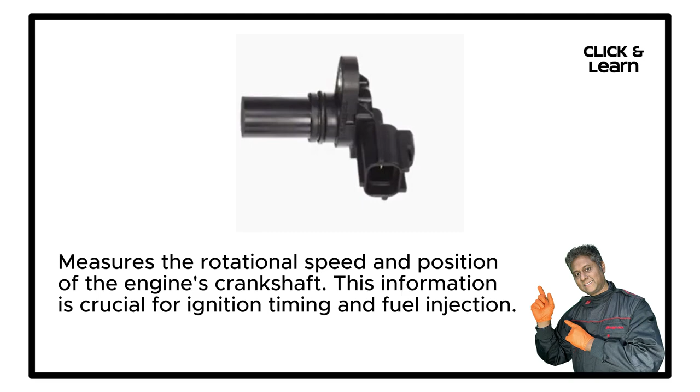Okay, let's get started. Crankshaft position sensor measures the rotational speed and position of the engine's crankshaft. This information is crucial for ignition timing and fuel injection. Typically uses a magnetic or Hall effect sensor to detect the rotation of the crankshaft's reluctor wheel, generates electrical pulses as the wheel's teeth pass by the sensor. The number and timing of these pulses provide information about the crankshaft's position and speed.

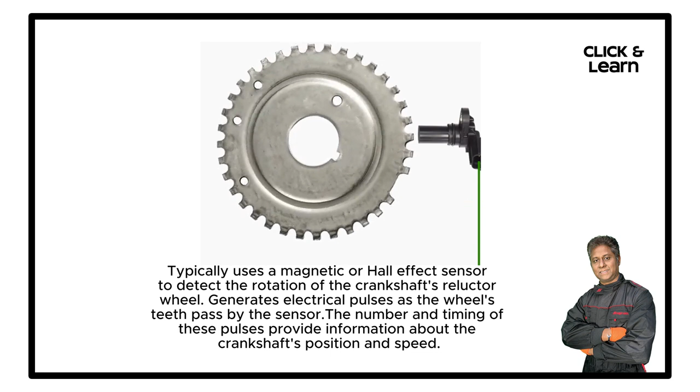It's usually located near the crankshaft, often behind the crankshaft pulley or on the engine block. If it fails, the engine may stall or have difficulty starting, poor performance, misfires, and rough idling.

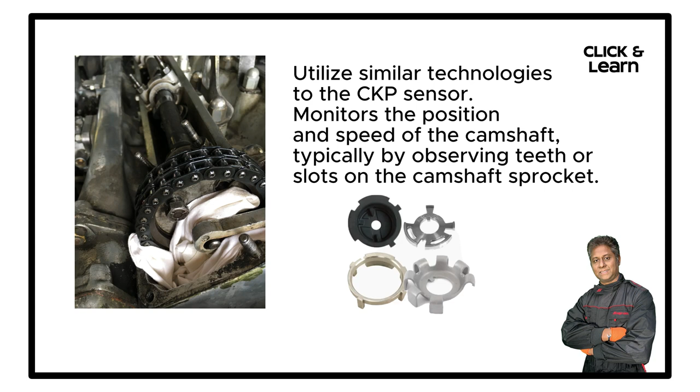Camshaft position sensor. It monitors the position and speed of the camshaft. It assists in synchronizing the opening and closing of engine valves. Utilizes similar technologies to the CKP sensor. Monitors the position and speed of the camshaft, typically by observing teeth or slots on the camshaft sprocket, typically mounted on or near the camshaft, often on the cylinder head or camshaft cover. Timing issues affecting ignition and fuel injection. Engine may stall or have difficulty starting.

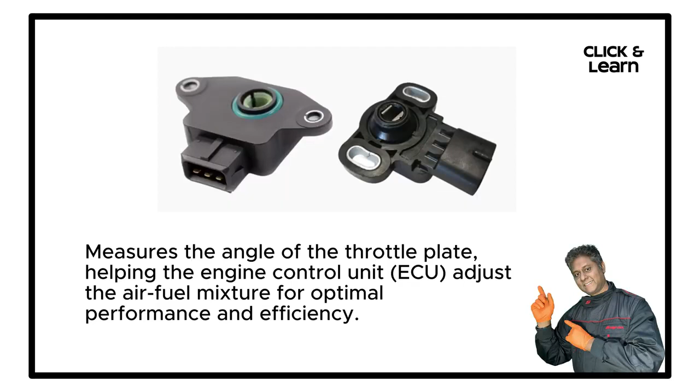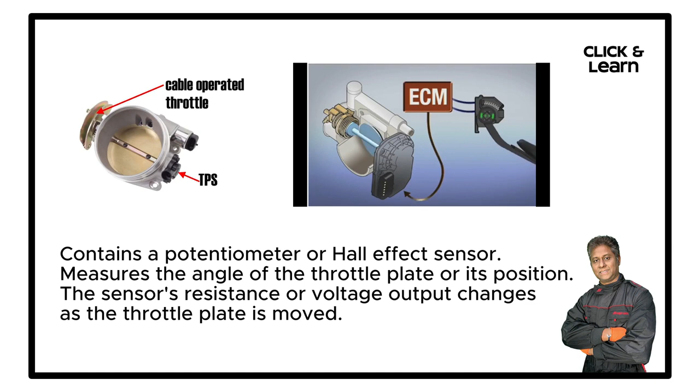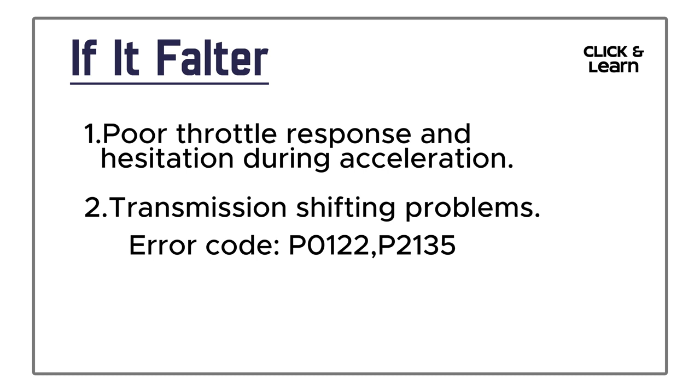Throttle position sensor measures the angle of the throttle plate, helping the engine control unit ECU adjust the air-fuel mixture for optimal performance and efficiency. Contains a potentiometer or Hall effect sensor, measures the angle of the throttle plate or its position. The sensor's resistance or voltage output changes as the throttle plate is moved. Mounted on the throttle body where the throttle plate is located. Poor throttle response and hesitation during acceleration, transmission shifting problems.

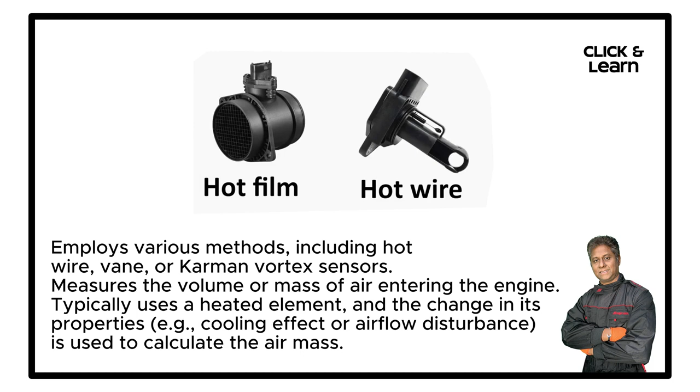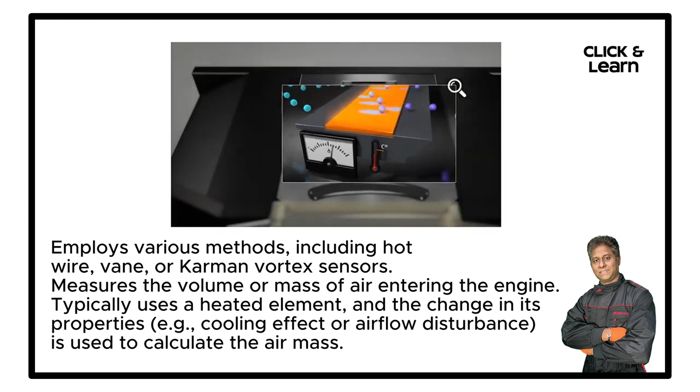Mass airflow sensor measures the amount of air entering the engine. The ECU uses this data to determine the appropriate fuel injection and ignition timing. Employs various methods, including hot wire, vane, or Kármán vortex sensors. Measures the volume or mass of air entering the engine. Typically uses a heated element, and the change in its properties, for example, cooling effect or airflow disturbance, is used to calculate the air mass.

Usually placed in the intake air duct between the air filter and the throttle body. 1. Reduced fuel efficiency and increased emissions. 2. Poor engine performance and potentially stalling.

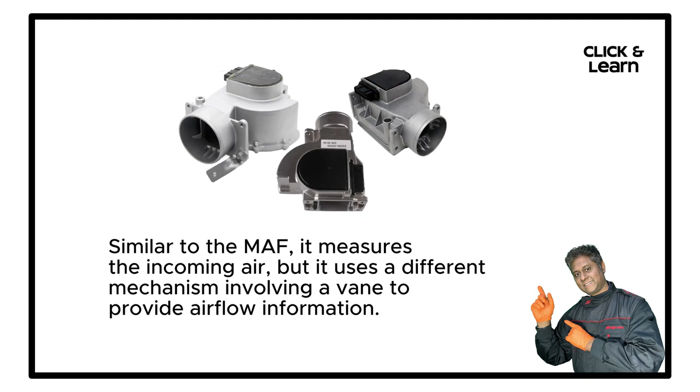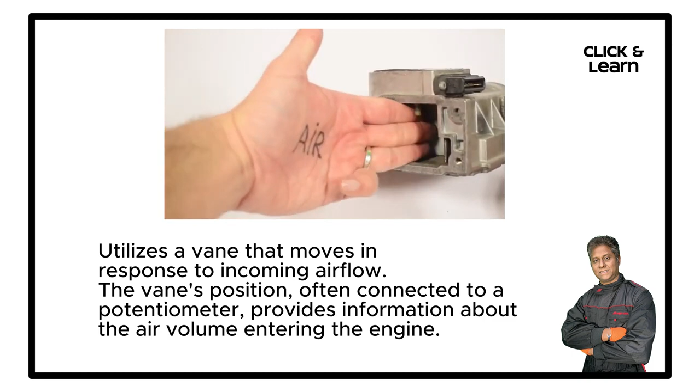Vane airflow meter. Similar to the MAF, it measures the incoming air, but it uses a different mechanism involving a vane to provide airflow information. Utilizes a vane that moves in response to incoming airflow. The vane's position, often connected to a potentiometer, provides information about the air volume entering the engine. Less common in modern vehicles. It would be in the intake air duct if present. Reduced fuel efficiency, poor engine performance.

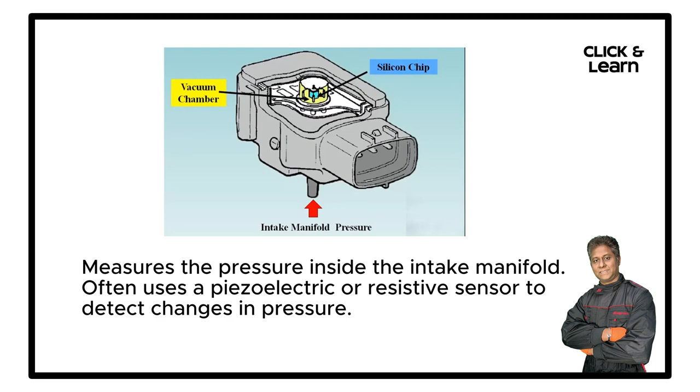Manifold absolute pressure sensor. Monitors the intake manifold pressure, which is used by the ECU to calculate engine load and optimize fuel injection. Measures the pressure inside the intake manifold, often uses a piezoelectric or resistive sensor to detect changes in pressure. Located on or near the intake manifold or throttle body. Engine may run rich or lean, leading to performance issues, poor fuel efficiency, and increased emissions.

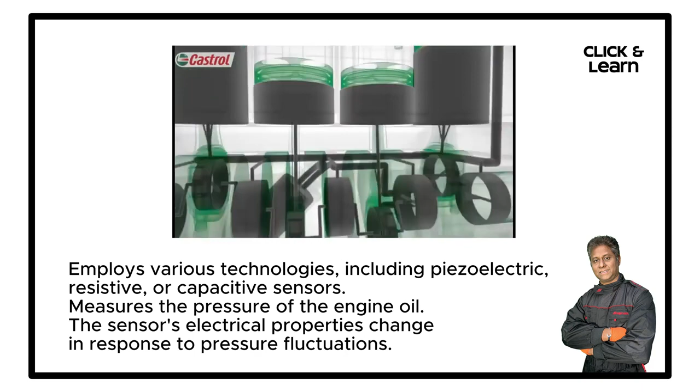Oil pressure sensor monitors the oil pressure in the engine. Low oil pressure can indicate a problem and may trigger warning lights or engine protection measures. Employs various technologies, including piezoelectric, resistive, or capacitive sensors. Measures the pressure of the engine oil. The sensor's electrical properties change in response to pressure fluctuations. Typically screwed into the engine block or cylinder head near the oil pump or oil filter housing. Risk of engine damage due to low oil pressure. Warning lights on the dashboard.

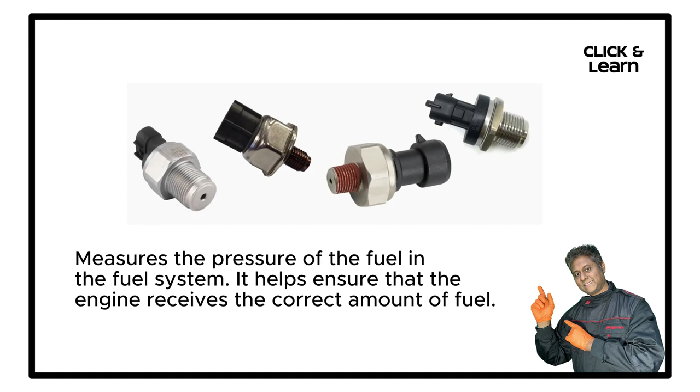Fuel pressure sensor measures the pressure of the fuel in the fuel system. It helps ensure that the engine receives the correct amount of fuel. Measures the pressure within the fuel system. Utilizes resistive or piezoelectric sensors to monitor fuel pressure. Located in the fuel system, often near the fuel rail.

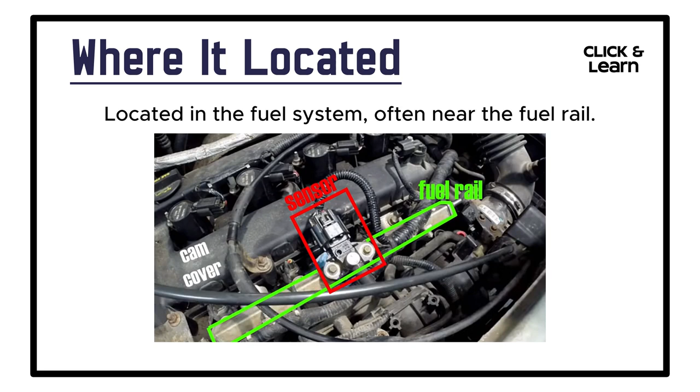Poor fuel delivery, affecting engine performance, risk of stalling or poor acceleration. Intake air temperature sensor monitors the temperature of the incoming air. This information helps the ECU adjust the air-fuel mixture for different environmental conditions.

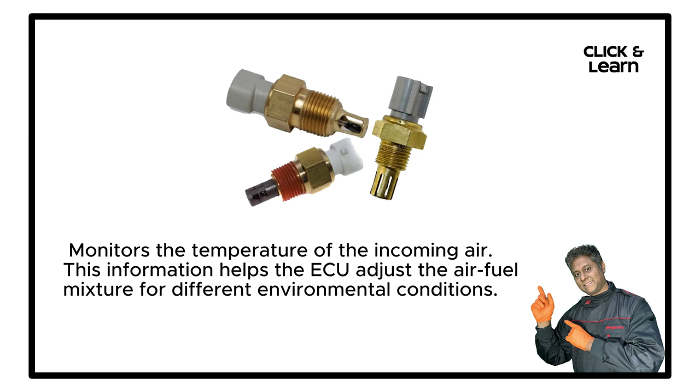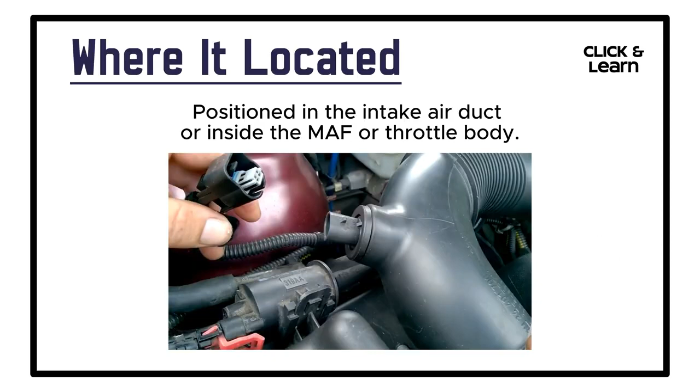Typically uses a thermistor or resistive element, measures the temperature of incoming air. The sensor's resistance changes with temperature, providing a voltage signal to the ECU. Positioned in the intake air duct or inside the MAF or throttle body. Incorrect air-fuel mixture, affecting fuel efficiency and performance. Potential for engine knocking or stalling.

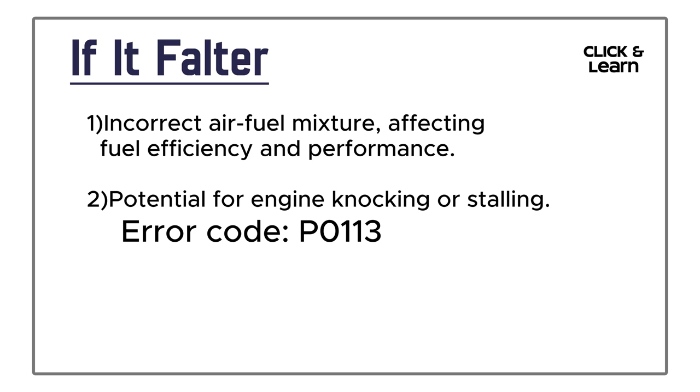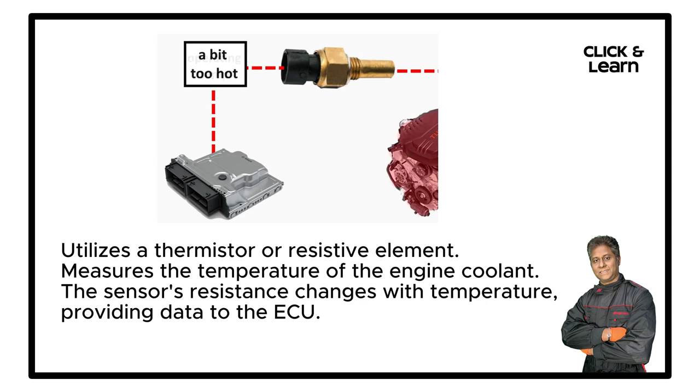Coolant temperature sensor measures the temperature of the engine coolant. It's essential for controlling the engine's operating temperature and preventing overheating. Utilizes a thermistor or resistive element, measures the temperature of the engine coolant. The sensor's resistance changes with temperature, providing data to the ECU. Often located on the engine block, cylinder head, or in the coolant passage near the thermostat. Poor engine cooling and potential overheating, incorrect fuel injection and emissions control.

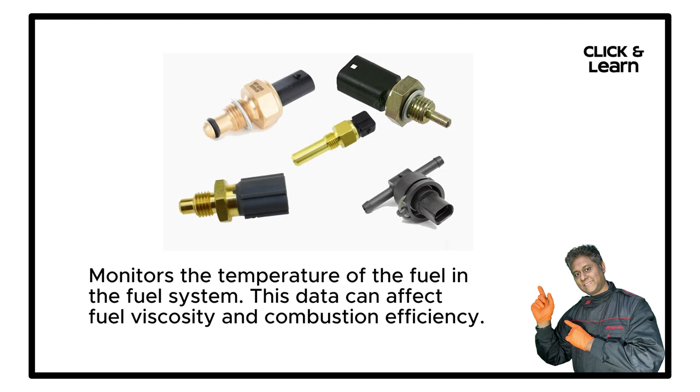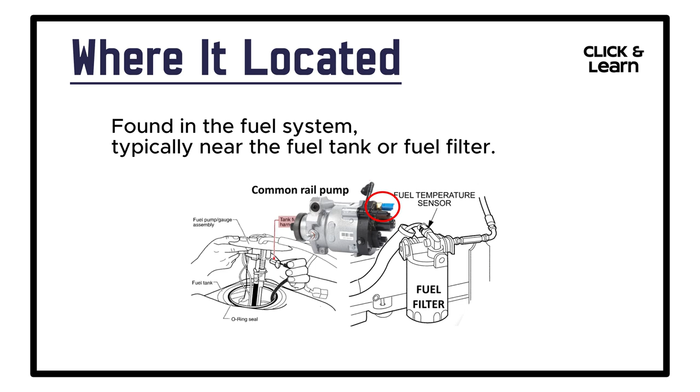Fuel temperature sensor monitors the temperature of the fuel in the fuel system. This data can affect fuel viscosity and combustion efficiency. Similar to the coolant temperature sensor, it measures the temperature of the fuel using a resistive element. Found in the fuel system, typically near the fuel tank or fuel filter. Potential fuel delivery issues, reduced fuel efficiency.

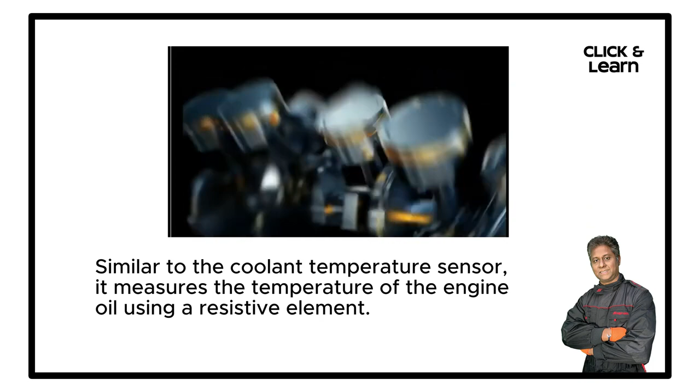Oil temperature sensor measures the temperature of the engine oil, which is important for maintaining oil viscosity and engine health. Similar to the coolant temperature sensor, it measures the temperature of the engine oil using a resistive element, usually installed in the engine's oil sump or near the oil filter housing. Incorrect oil viscosity and lubrication, potential engine wear and damage.

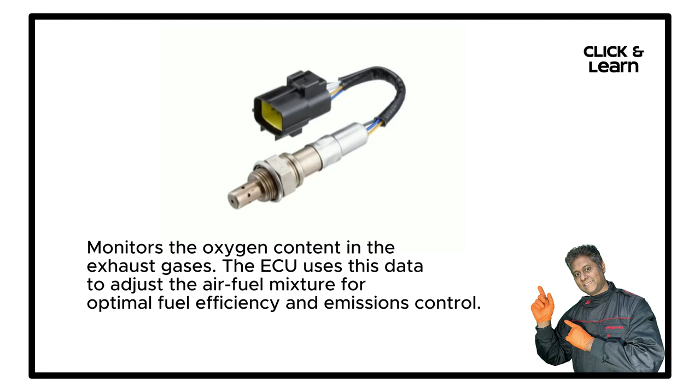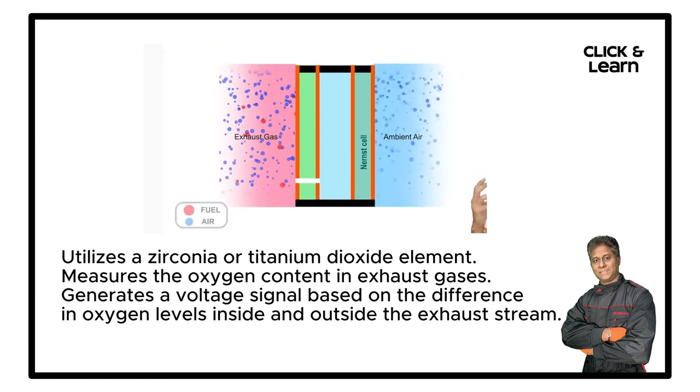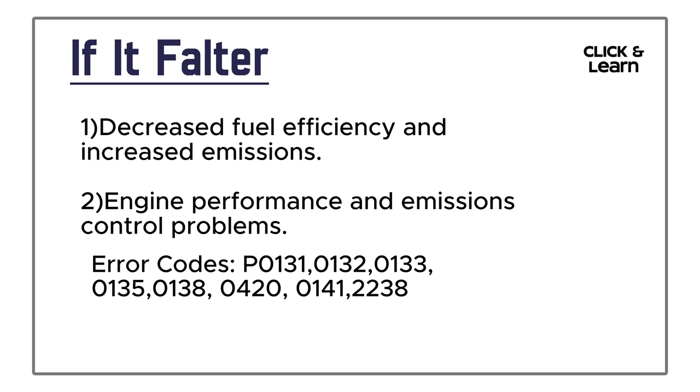Oxygen (O2) sensor monitors the oxygen content in the exhaust gases. The ECU uses this data to adjust the air-fuel mixture for optimal fuel efficiency and emissions control. Utilizes a zirconia or titanium dioxide element, measures the oxygen content in exhaust gases, generates a voltage signal based on the difference in oxygen levels inside and outside the exhaust stream. Positioned in the exhaust system, both upstream before the catalytic converter and downstream after the catalytic converter. Decreased fuel efficiency and increased emissions, engine performance and emissions control problems.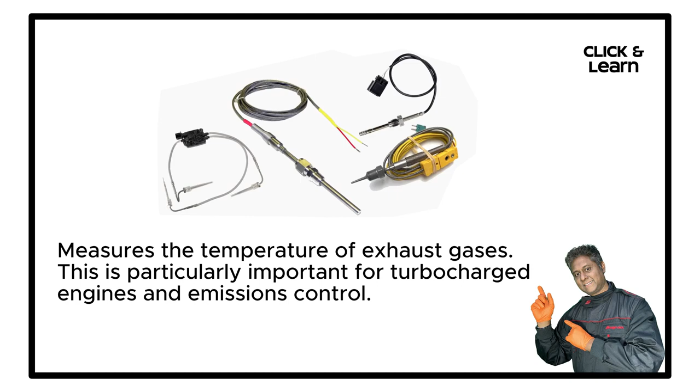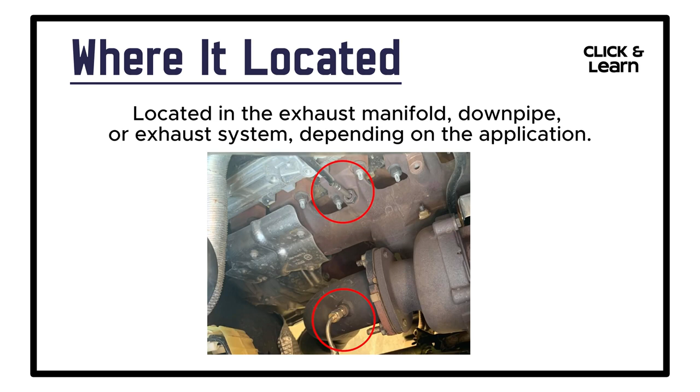Exhaust gas temperature sensor measures the temperature of exhaust gases. This is particularly important for turbocharged engines and emissions control. Utilizes thermocouples to measure the temperature of exhaust gases directly. Located in the exhaust manifold, downpipe, or exhaust system, depending on the application. Issues with turbocharged engines, potential damage to the turbocharger or emissions control problems.

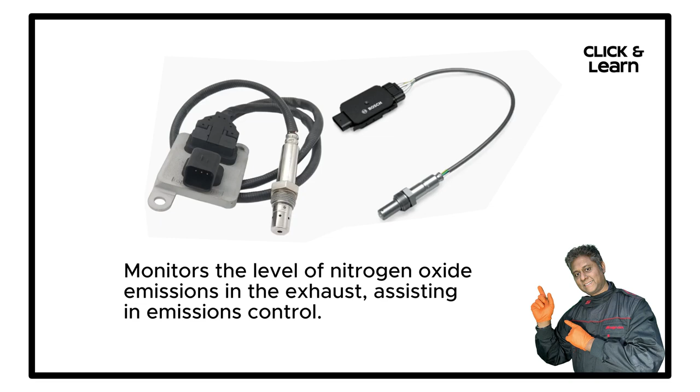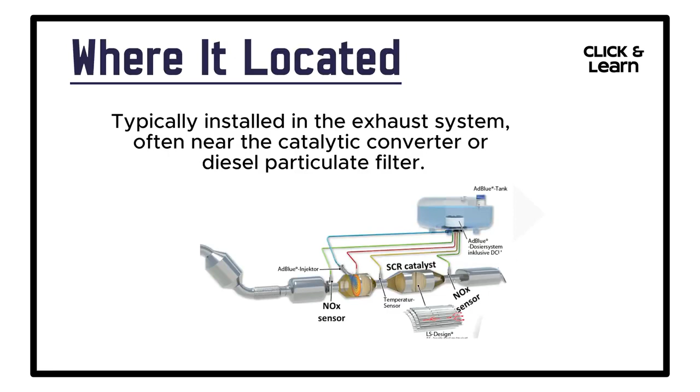Nitrogen oxide sensor monitors the level of nitrogen oxide emissions in the exhaust, assisting in emissions control. Uses various methods, including electrochemical cells or other chemical reactions, to detect the presence of nitrogen oxides in the exhaust gases. Typically installed in the exhaust system, often near the catalytic converter or diesel particulate filter. Increased emissions and potential failure to meet emission standards, reduced fuel efficiency.

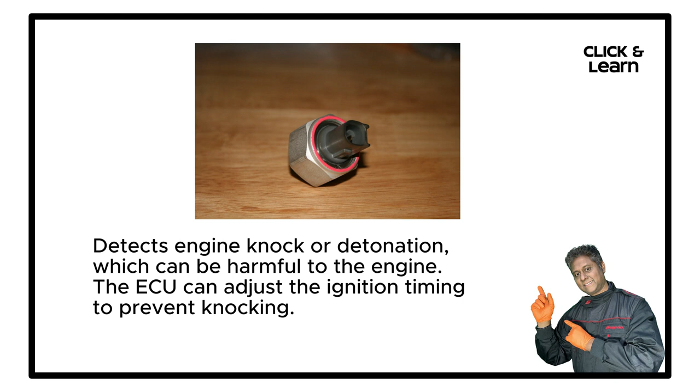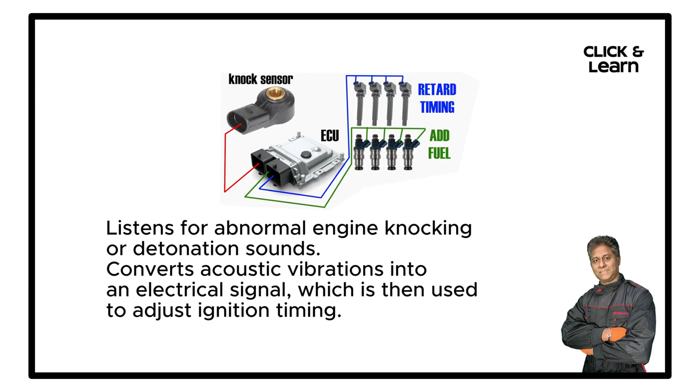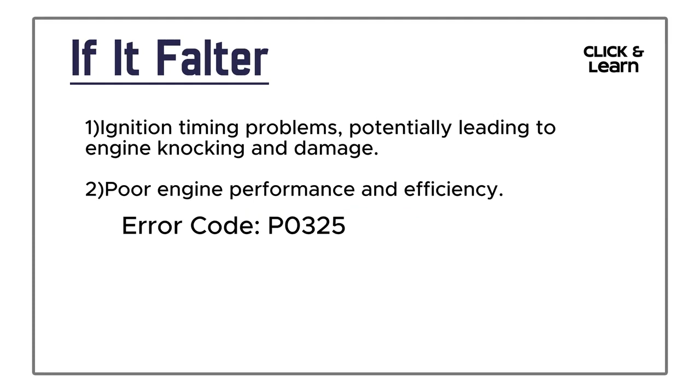Knock sensor detects engine knock or detonation, which can be harmful to the engine. The ECU can adjust the ignition timing to prevent knocking. Listens for abnormal engine knocking or detonation sounds, converts acoustic vibrations into an electrical signal, which is then used to adjust ignition timing. Usually mounted on the engine block or cylinder head, in close proximity to the cylinders to detect engine knock. Ignition timing problems, potentially leading to engine knocking and damage. Poor engine performance and efficiency.

There you have it, a deep dive into the world of vehicle sensors. We've explored what they are, how they work, where they're located, and the consequences when they malfunction. From the crankshaft position sensor to the knock sensor, these sensors are the unsung heroes of your car's performance.